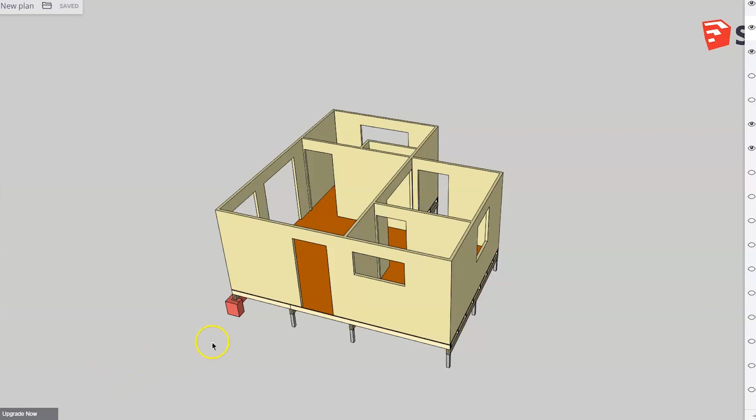Hello, today we are going to look at a brief overview of the construction of a pitched roof and ceiling frame. So here we just have a very simple small layout of a house. I've just drawn this up in a free SketchUp program. So very simple, straightforward few wall frames in there.

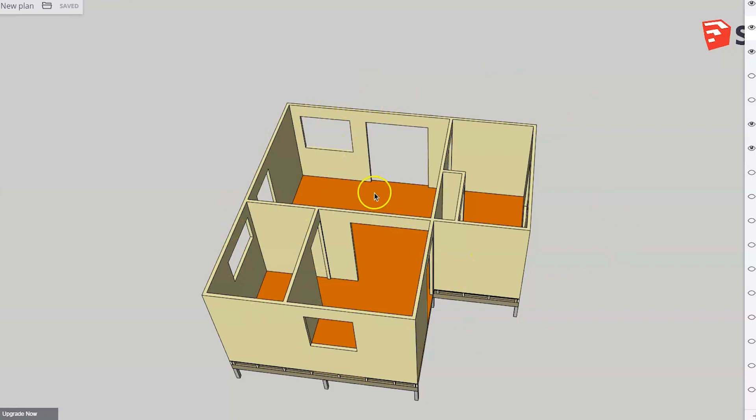Just to avoid things getting a little bit confusing when talking about the roof, I've just taken a copy of those top plates which I've placed over here, and this is what we'll be working on today. So we're not going to look at any detailed construction techniques. It's just a basic overview of the process of going through and building this roof frame.

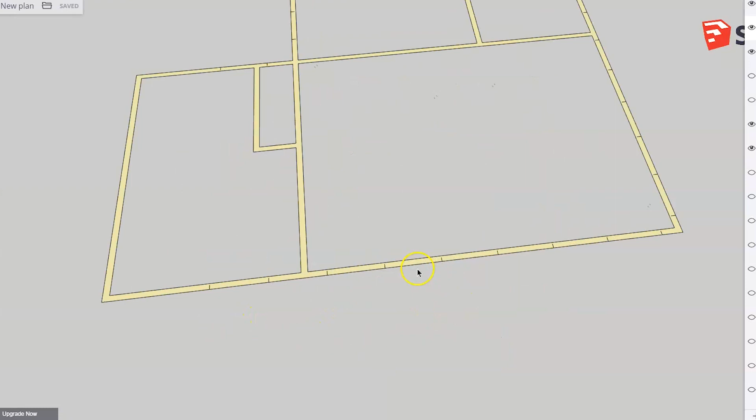So the first thing you'll notice on these top plates is I've got a few pencil lines marked across here, and they are the positions of the rafters all marked out there. I'm not going to go through how to work out those positions. I've got other videos for that.

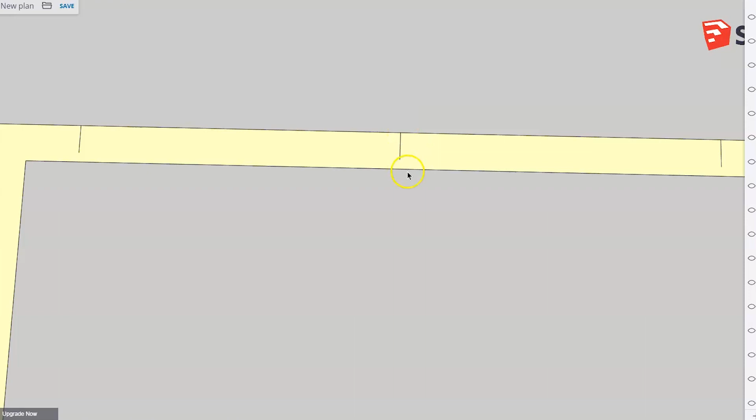But the one thing we do want to look at is that these marks are the edge of my rafters, and you'll notice if I turn the rafters on, they are on one side of the line, and my ceiling joists are on the other side of the line. And there's a very important reason for that. The first thing we need to mark out is our rafter positions. But the first pieces of timber that we're going to install is going to be our ceiling frame.

And here's the first members that I'm putting in. These are our ceiling joists. They just go from top plate to top plate. They take our ceiling sheets in from underneath. And we've got a few trimmers where the hip ends are and we can't get a ceiling joist right along the wall. We have to turn trimmers around there, lining up with those marks that we had for our rafter positions.

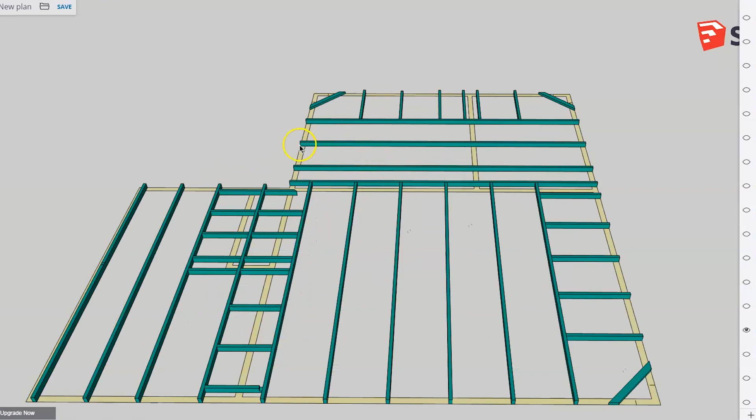So there's a reason we want to start with our ceiling joists, and one is to tie these top plates together so that the weight of our rafters doesn't push our wall frames out. The other reason is once my ceiling frame is in, I can lay some planks or maybe some plywood across them, and it gives me a relatively level platform that I can walk around on while I'm building the roof frame. Just makes it a lot easier to get those rafters up afterwards.

So let's look at these ceiling joists. Now you can see that in a normal house, these ceiling joists may need to span quite a long distance. So I've got a couple of choices. I can either use quite large pieces of timber that can go across in one hit, or I can actually save a bit of money and use smaller pieces but support them through the middle.

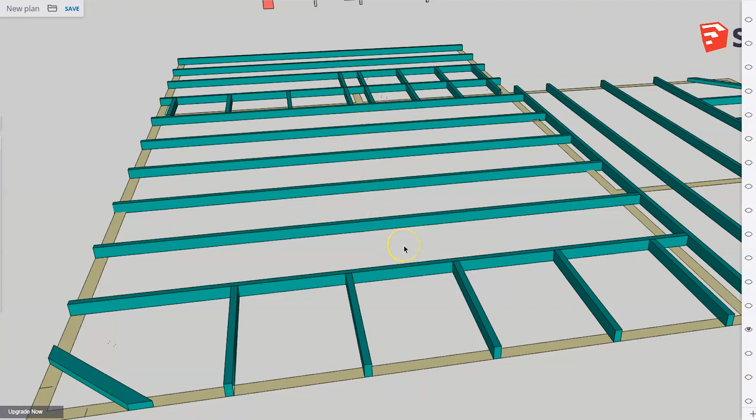At the moment these are a single span ceiling joist. If I support them through the middle, it makes them continuous span, and it also halves the effective span that they have to carry. And we do that with hanging beams. Let me just turn them on if I find them in my list. There they are. So there's some hanging beams.

So you can see over here, we've got a span there that's not very big, so that ceiling joist can span that, no worries. This span here is a little bit bigger. So I've got a hanging beam in there, obviously called that because the ceiling joists hang from them underneath. We'll nail some little cleats on there just to connect them so they can't separate.

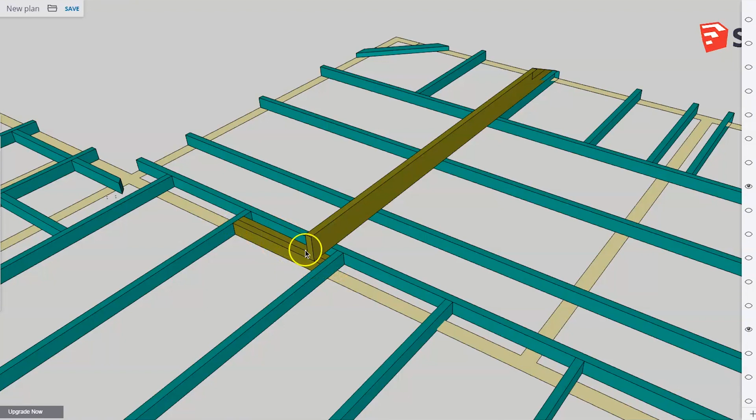And the hanging beam is blocked up on the end by some blocking, or if you can't get blocking in, you might line it right up over the top of a ceiling joist trimmer here. And of course that angle is cut off just to suit the angle of those roof rafters, which I'll deal with in a second. So those are the hanging beams.

Now this hanging beam here you can see is in the same situation as the ceiling joist. It's actually quite long, which means a huge piece of timber to span that distance. Or I can support my hanging beam halfway through the middle. And I do that with a counter beam. And that's the counter beam there. Just gives me a chance to halve the span of these hanging beams and reduce the size of the piece of timber that's got to be hauled up into the roof to do that.

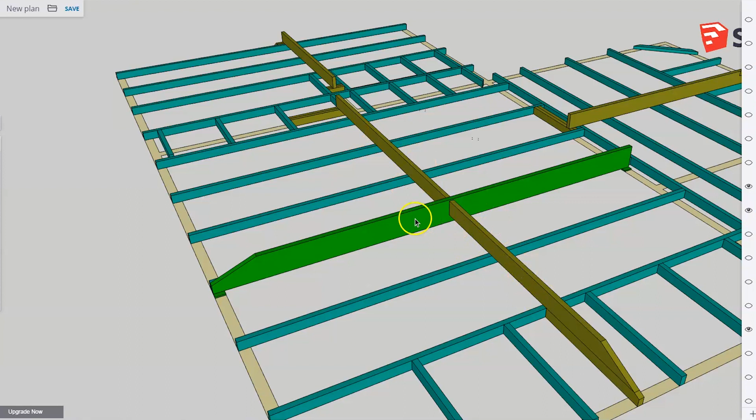So there's our basic ceiling frame. Ceiling joists, hanging beams to hold up the middle of our ceiling joists, and strutting beams to hold up the middle of our hanging beams.

You'll notice over here these hanging beams don't line up with each other, and that's okay, provided these ceiling joists are not spanning more than they're allowed to, which you determine from the span tables. They don't really have to be dead in line with each other. And you'll find this is only positioned here because there happens to be a convenient wall sitting in a spot where we can run this off.

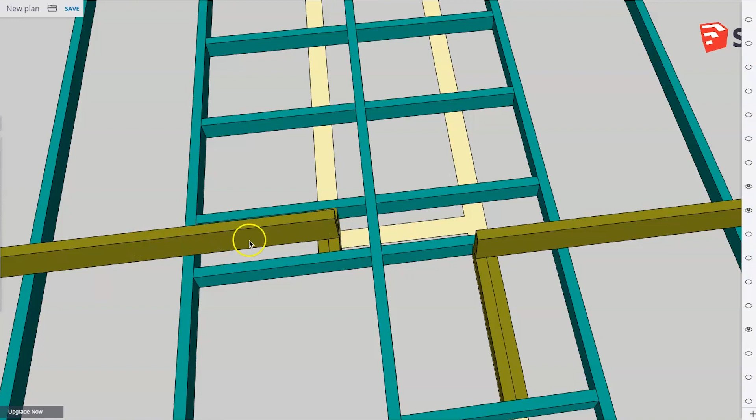And when you're dealing with a hand-pitched ceiling frame or a hand-pitched roof, that's really what it's about, finding whatever you can find to prop things off and to block things up off. Right, so that's our ceiling frame. It's all nice and firm and supported. I can get up there with a few planks or sheets of plywood and I can start installing my roof members. So the first roof members I'm going to worry about are my common rafters and my ridge boards.

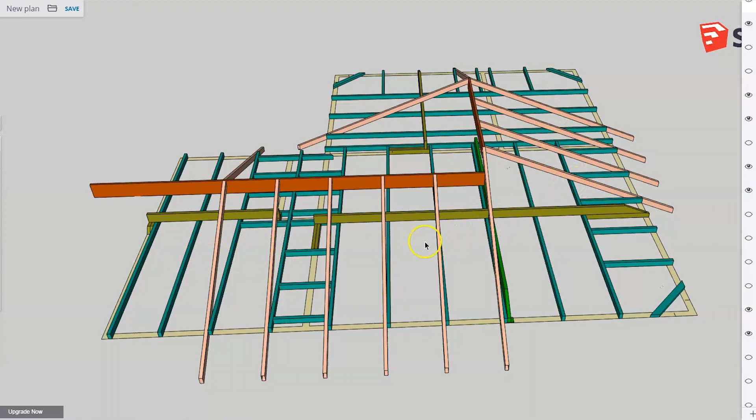So these get the basic skeleton of the roof up. These common rafters are the easiest rafters to cut up. There's usually multiple ones all cut the same through there and multiple all cut the same through there. Once we put those up, that gives us the basic kind of shape that we can fill everything else in.

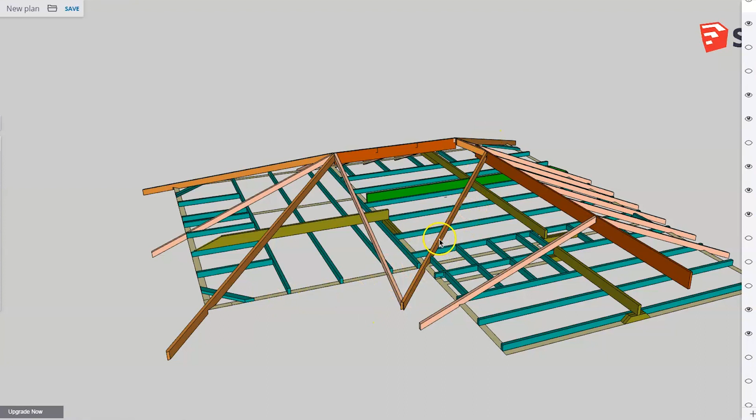So the next thing, once we've got common rafters and ridges, we can get our angled corner pieces in, which are our hips and our valleys. So there's our hip rafter on this end, on that end. Here's our hip end on that side, and there's our valley going up through there. You'll notice this end is a gable end on the roof, so there's no hip rafters on that section.

So anyway, we've got some shorter creeper rafters to put through here. And try that again without coughing.

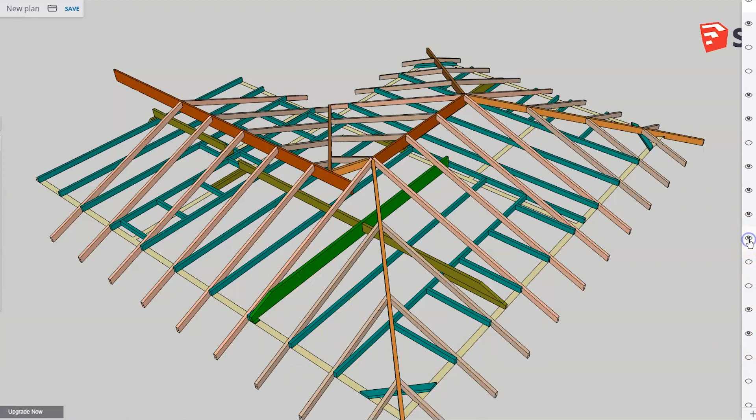So we've got some shorter creeper rafters to fill in these corner pieces. So they're the next ones to go in. And that fills in our hip ends. You'll notice all those creepers line up with our ceiling joist trimmers. And we've also got the creepers coming down into this valley rafter here. These are our valley creepers.

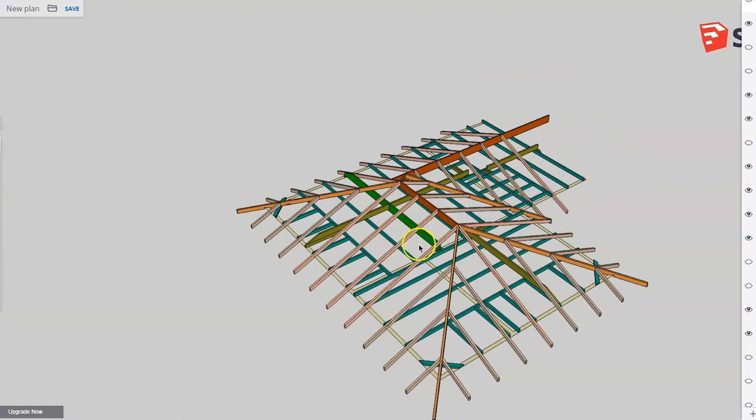And you can see that is basically the main roof done. We've got a bit of missing roof over here on that gable end. Let's have a look at that end. Now there's a reason this is not built yet. That's because these rafters right out on the end, these are our barge rafters because that's where the barge board gets nailed to. Some people will call them verge rafters, it's the same thing.

But whereas these rafters have both a ridge board and a top plate to sit on, this doesn't. There's nothing holding up this end. So we need to put in some framework to be able to hold up these barge rafters. So let's just get rid of that for a moment.

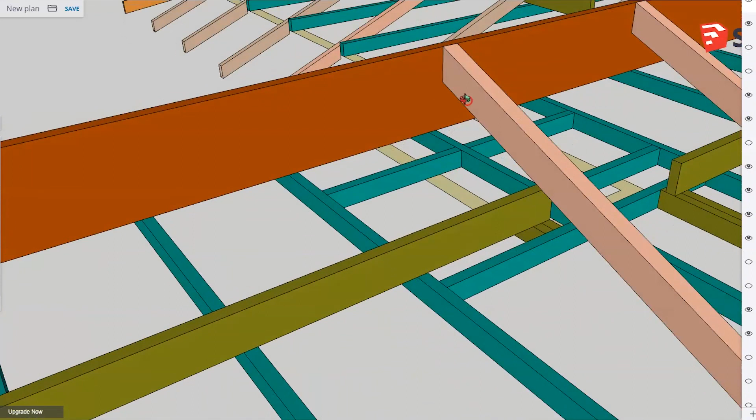The easiest way to do it, if I have a look at where this rafter hits, if I just grab the bottom corner of here and just run a line out along the ridge to give me a height, and where the rafter hits on the top plate, I can just measure that distance along there and run that line over here, and it gives me a finish point down there, and I can build a little gable wall like that.

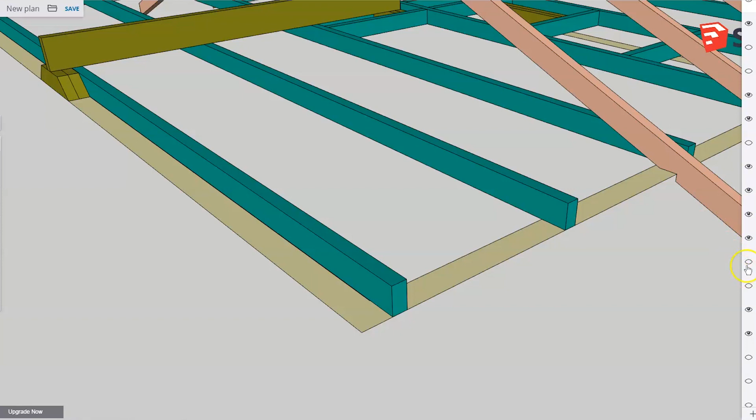So you can see the top of the wall lines up with the bottom of that previous rafter, and the top of this point lines up with the bottom of that point of that rafter. It's really just measuring how far across the top plate it hits and copying that measurement there.

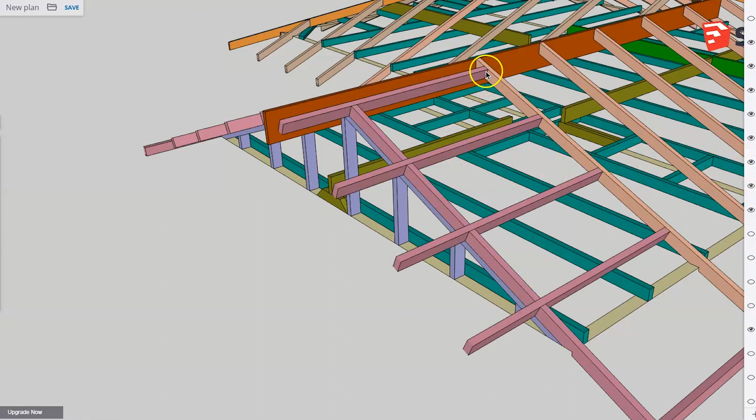So once this little end wall is in, I can run some pieces across to overhang that, and those pieces are called outriggers. So there's our outriggers going from our previous rafter, carrying over the top of that wall and coming out over the end, ready for us to nail our barge rafters to it. And that forms up that little overhang there. If I can get a view under there. So there's our overhang for our gable end built.

Now you'll notice something, and any of you who have ever built a truss roof, you'll notice something looking a little bit different here. And that is that this rafter here is quite a distance back from that wall. Now, most truss roofs that I've built, whatever that overhang is, this next truss back here is the same distance back. But on this hand-pitched roof, the first rafter back is much further.

And that's because trussed roofs are designed and engineered by the truss manufacturer. A hand-pitched roof like this is designed and engineered by the AS 1684. It comes out of an Australian standard. And the AS 1684 actually specifies that these outriggers have to comply with a certain rule, and that is that whatever the overhang is, the back span must be at least double. And that's why this rafter is so far back.

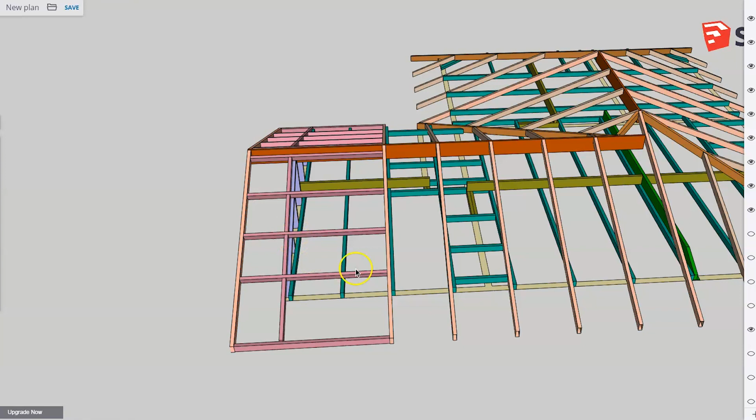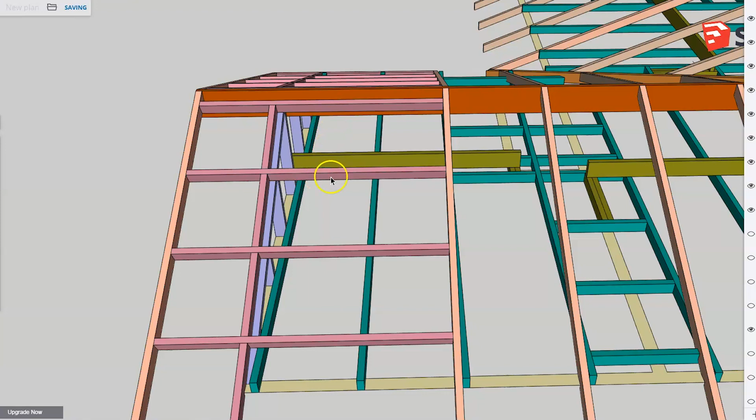Okay, so just in case you looked at that and thought, gee, that doesn't look right, it is a different looking construction than a trussed roof. And the only difference is you've just got to make sure that when you put your roof battens on, your roof battens have an allowable span, and if that span there is too great, then maybe it's either a case of moving these blocking pieces back a bit or putting a second row of blocking through. But that is the basic shape of our roof.

Alright, now we're going to have a look at these rafters. These rafters are also in the same situation that these ceiling joists were in. I can either use big size rafters to span the whole distance in one hit, or I can support them in the middle and use smaller size rafters and save a little bit of money in volume of timber. And what supports these is called an underpurlin.

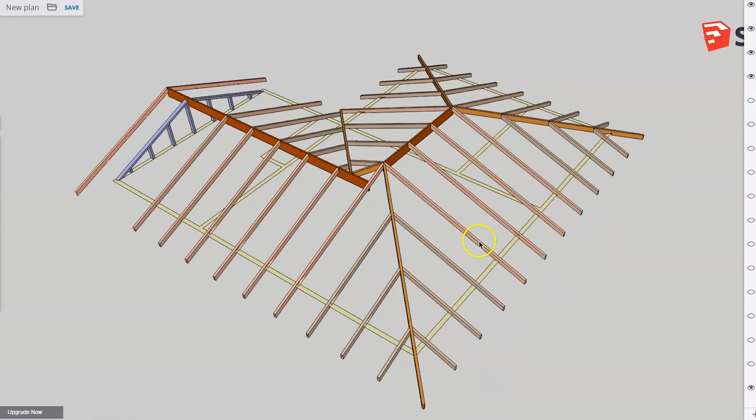So before I put that in, I'm just going to turn off the ceiling frame just so it doesn't get quite so confusing looking at all these different lines. And in fact, I might even just turn those outriggers off too, just to make it a little bit clearer. So here's a view of the top of our roof. I'm going to throw in our underpurlins as soon as I find them. There they are. So a piece of timber that just runs all the way around.

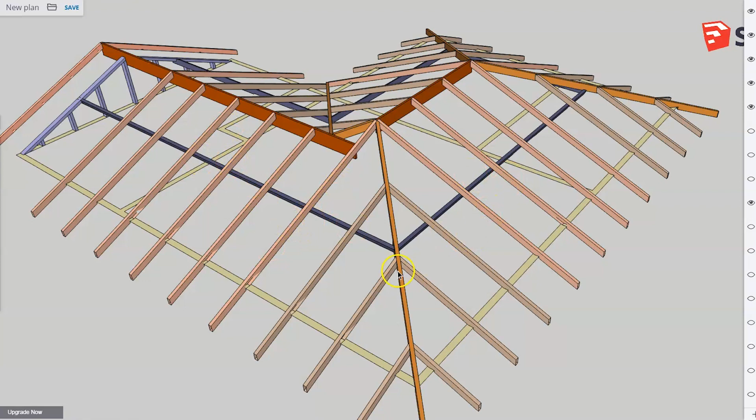You'll notice it's not exactly halfway, it's slightly above halfway there, slightly below halfway there. That's just because I've got two different size roofs. And that's okay, so long as it's in the middle third. So it's in the middle third of both roofs. And that underpurlin just sits up underneath and supports the middles of those rafters. So of course the next question is, what is holding up the underpurlins?

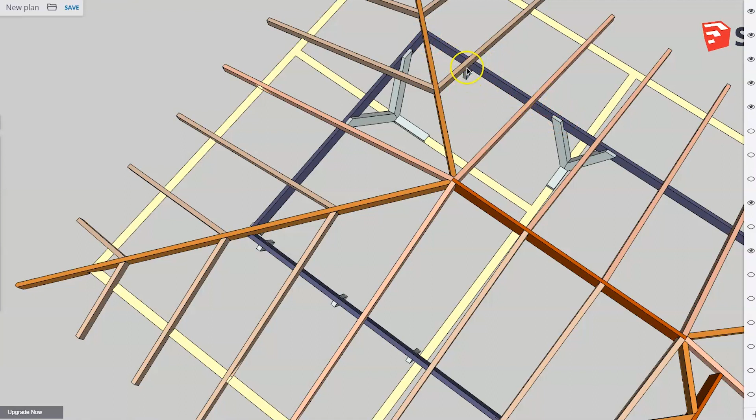Well, I'm going to have a look around from this side, and I'm going to show you the struts. So there's a couple of fan struts in here, there and there. They just basically strut off a wall and hold up the underpurlin. But you'll notice this underpurlin spans a long way from where that's supported by that strut. It's trying to cantilever a long distance, so I need to strut something up here, but there's no wall to go off. And same situation over here, I've got a wall there to strut off, but nothing through here.

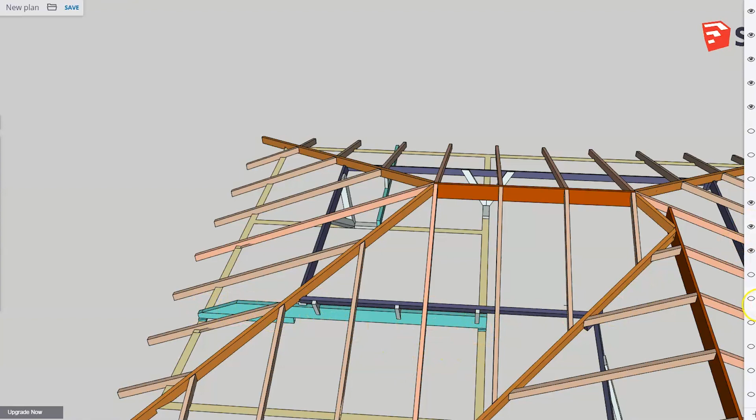So I need these struts to sit on something. And so I can use a strutting beam. And there's a strutting beam just blocked up off the top plates. Now I'm going to turn the ceiling joists back on so that I can show you something very important down here. I zoom in on that strutting beam and I just take a look under there. You'll see the strutting beam is not sitting on the ceiling joists. And that's because ceiling joists are not designed to take roof load. They're only designed to take ceiling load. So you cannot have your strutting beam sitting on top of your ceiling joists.

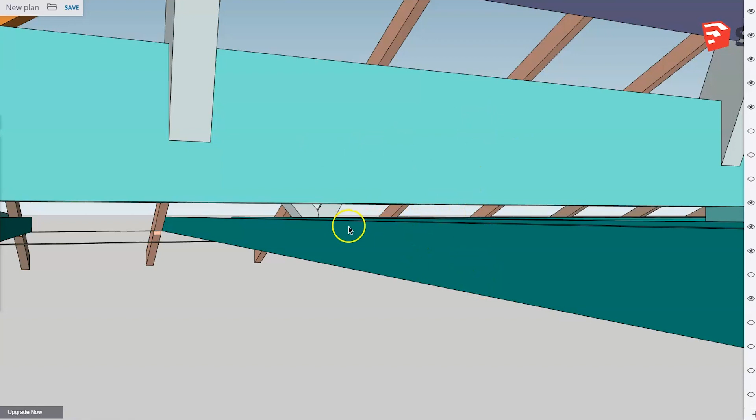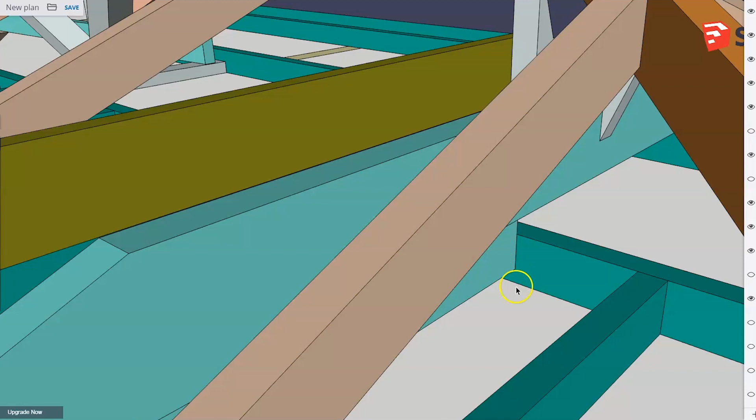Okay, and so if I turn the hanging beams back on, you can see the strutting beam. If I just get a bit of a view through there, you can see the strutting beam has been blocked up a little bit higher there. And over this end, I've just thrown in an extra trimmer, if you want to call it that, although it's sitting up above the ceiling, so it's not taking the ceiling, but it's a piece just so I can get that strutting beam attached and sitting on the wall frame.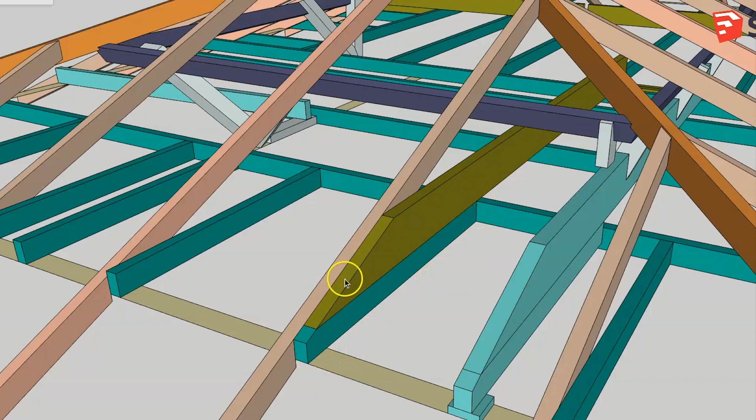So ideally, if these cuts on strutting beams or hanging beams are too shallow and your beam is not sitting directly over the top plate, you might have to put a strap or something on the back of those trimmers just to lock it together and turn that end into kind of a little engineered beam, if you want to call it that, just so that it's got decent support at the ends there and there.

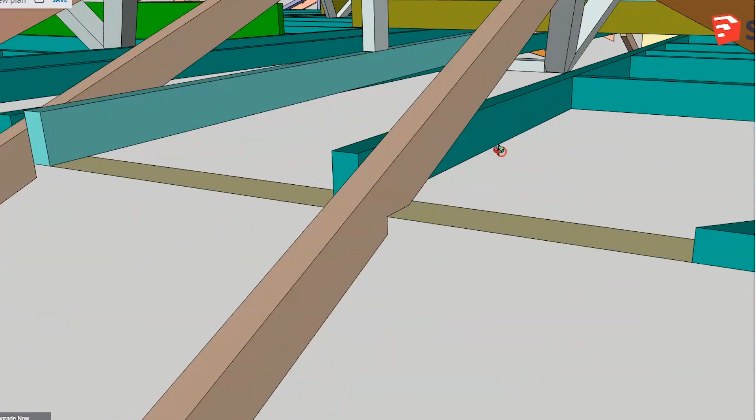So we've actually got two different types of strutting beams here. We've got one that goes across over the top of our ceiling joist. We've got one over here that is parallel and sitting in between our ceiling joists. But if I get a view through there, there is still a requirement for that to be blocked up above the ceiling lining. And all of these blocking sizes, the distance that these have to be blocked up, they all come out of the 1684. So it's very important that that document, AS 1684, becomes your best friend on the building site.

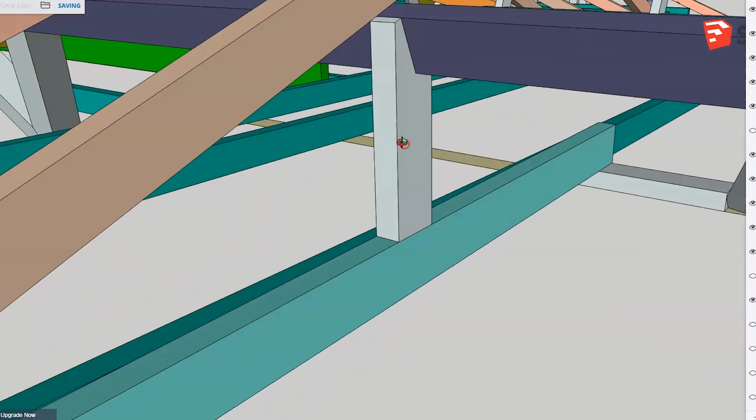So here we have an example of a vertical strut. We've got some angled cuts around the underpurlin and just a flat cut at the bottom. And we've got over this side some perpendicular struts where we've got some square checkouts around the underpurlin and our angled cuts are around our strutting beam.

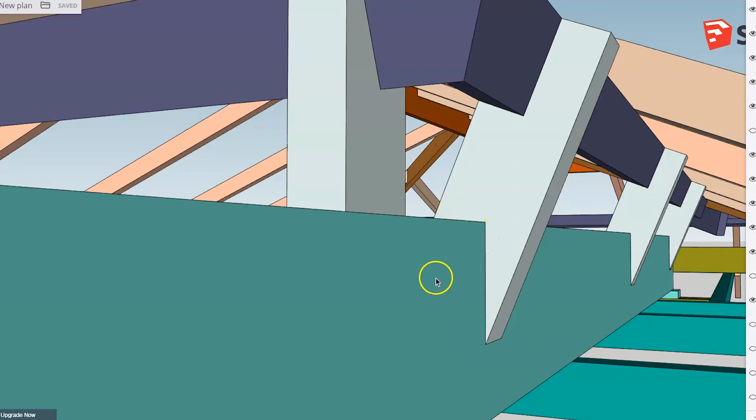Alright, while we are on the subject of holding up our underpurlins, I want to have a look at this corner over here. You can see there are absolutely no wall frames that we can strut off, and we actually can't get any strutting beams either because we've got a hanging beam in the way of anything running that way, and we've got a counter beam in the way of anything running that way. So we've got a couple of options. One thing we could do is put a strut from the underpurlin down to the counter beam, but doing that comes at a price.

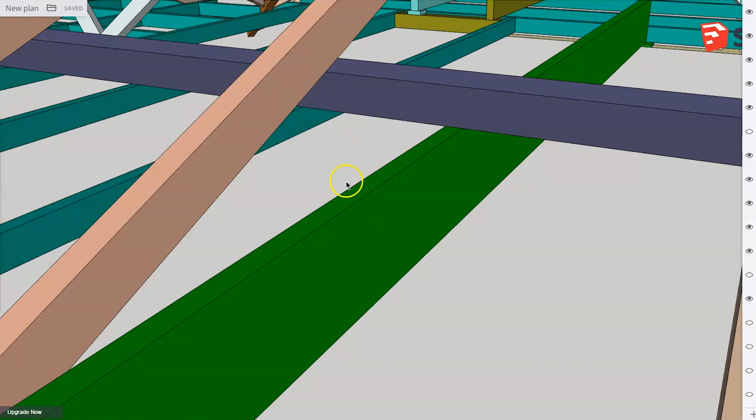Right now, this beam is a counter beam only, designed to take ceiling loads only. If we strut off it, it becomes a combined counter strutting beam, which means we have to use a different span table to size it. It has to get a little bit bigger so that it can take both roof and ceiling load. And it's very important to understand that if you size a piece of timber and you install it, you know what you have sized it as.

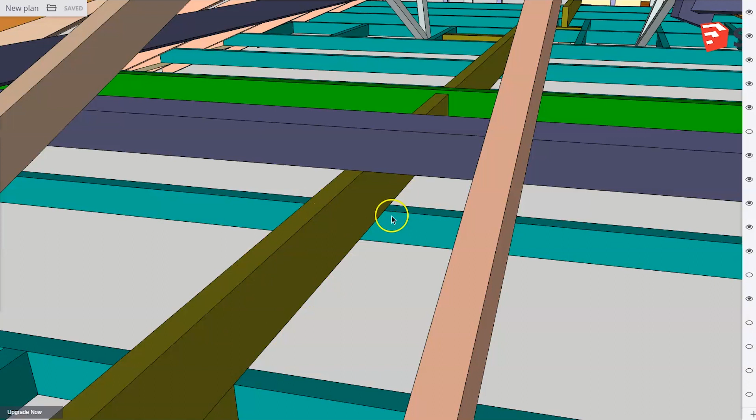And the same thing we can do around this way. We could run a strut down to that hanging beam and turn this into a combined hanging strutting beam. If we were to do that, this hanging beam would be a combined strutting beam, and you would find that it would be a little bit bigger than this one, because this one is only taking ceiling load. But for today, I've decided I'm not going to turn those into combined strutting beams. I'm going to use a different method to hold up this underpurlin.

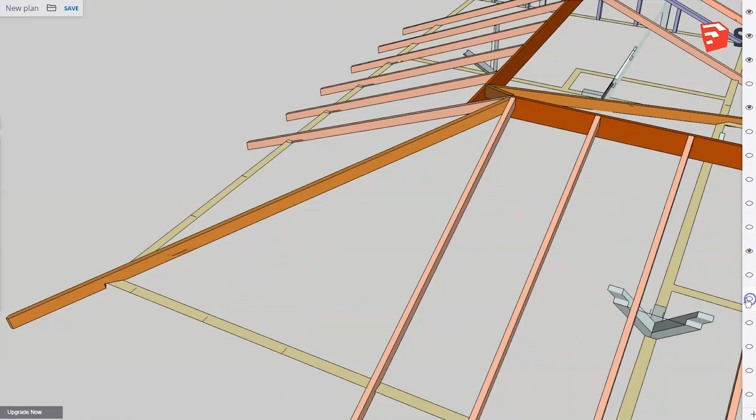And before I show you what it is, I'm just going to turn off some rafters so it's easier to see what I'm talking about. So I'll get rid of them. I better turn that underpurlin back on. So there's my underpurlin. You'll notice the connection here is a little bit different. Over this side, the underpurlin has been cut around and underneath, and the underpurlin is holding up the middle of that hip rafter.

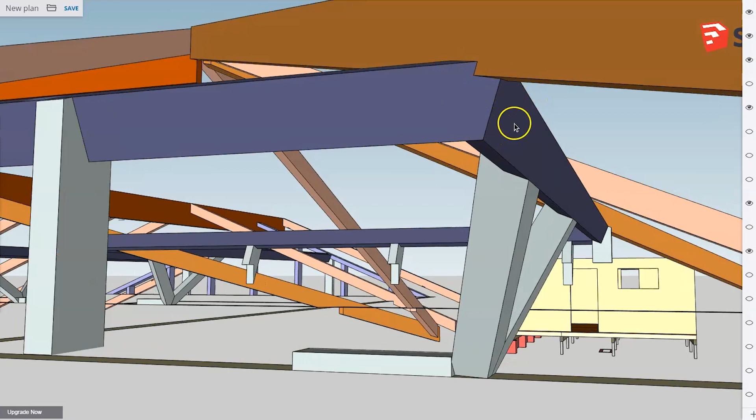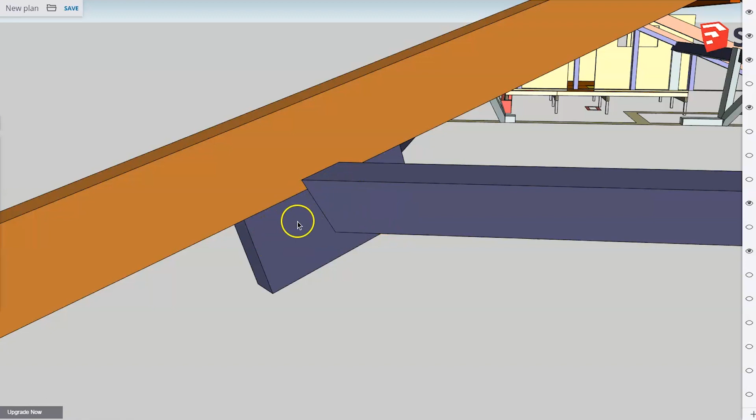But over here, I've attached a block to the underside of the hip rafter so that I can just have a straight cut, and I might have a piece of metal strapping or something connecting that block on nice and securely, maybe some framing anchors holding the underpurlin on. Instead of using the underpurlin to hold up the hip rafter, I'm going to do the opposite and use the hip rafter to hold up the underpurlin, and I do that with a tie bolt. And there's a tie bolt. It's just a big metal rod which bolts at either end in a position that doesn't get in the way of the rafters.

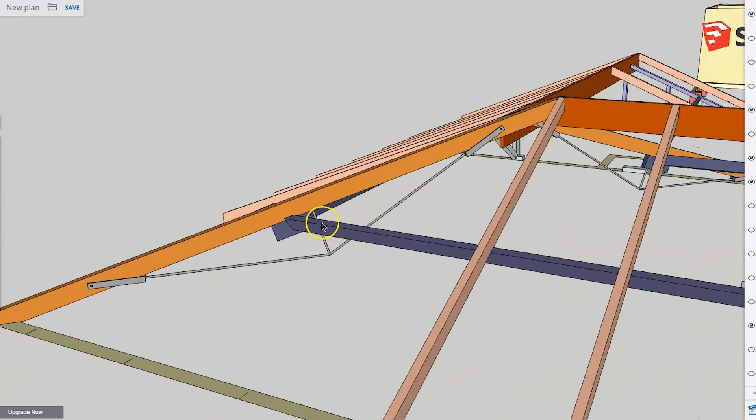It's got a little support, and if you'll notice, it kind of looks a little bit like an upside down truss, and it works in kind of the same way, using that triangular shape to support the middle of that hip rafter. That hip rafter has now been strengthened, and it can carry the weight of the end of that underpurlin, which now goes across here. The underpurlin is now supported at both ends and is supporting our rafters.

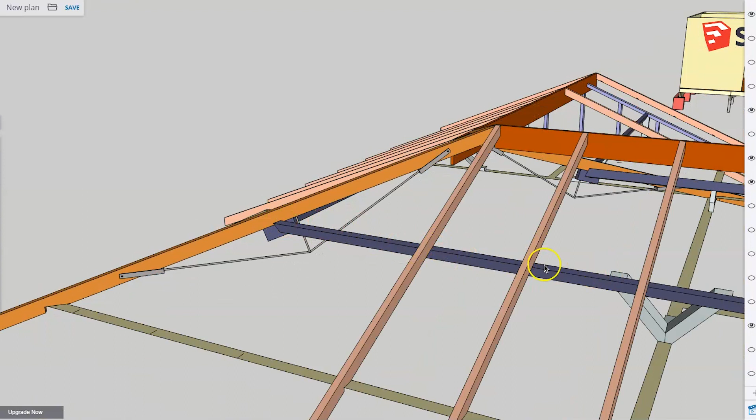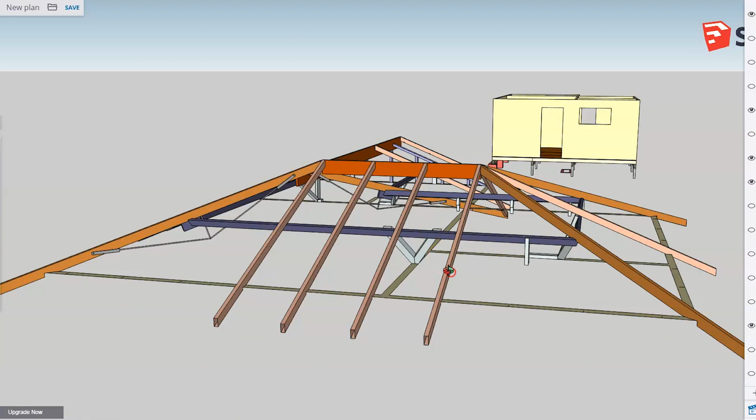So that's our options. We can use a tie bolt to hold up the hip rafter, and the hip rafter holds up the underpurlin, or we can use a strut to hold up the underpurlin, and the underpurlin holds up the hip rafter. So those are our options, and of course this end would probably be our preferred option, but if we can't get any strutting beams through or any wall frames in the right spot, we have to go to our tie bolt.

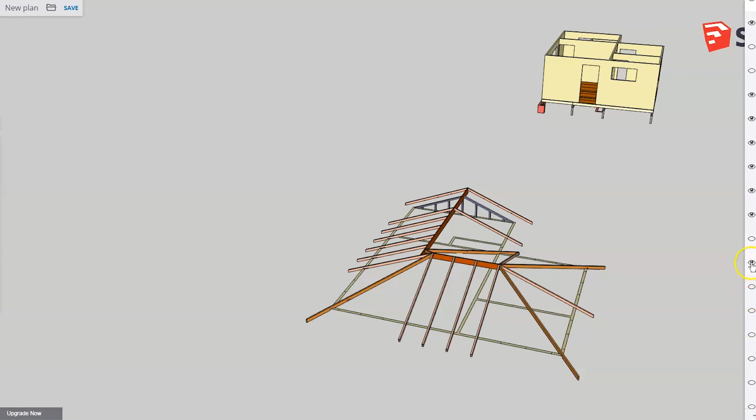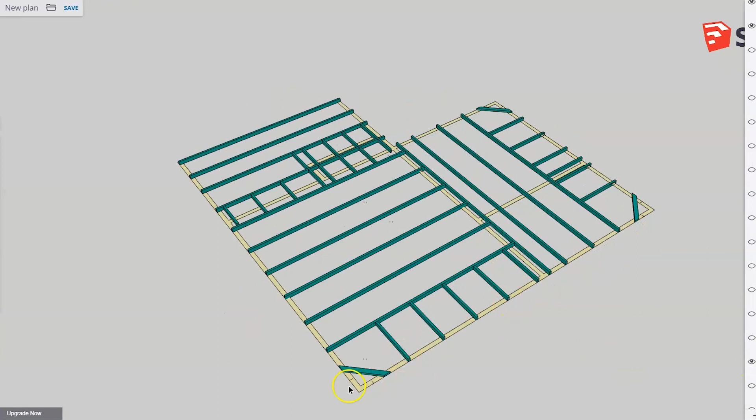Alright, so let's get rid of all of those and we'll do a very quick recap over what we have just covered. We start off with our wall frame, our rafter locations marked. We mark out our roof frame first, but we install our ceiling frame first. So there's our ceiling joists, our trimmers in there. We use hanging beams to hold up the middle of our long ceiling joists, and we use a counter beam to hold up our long hanging beams.

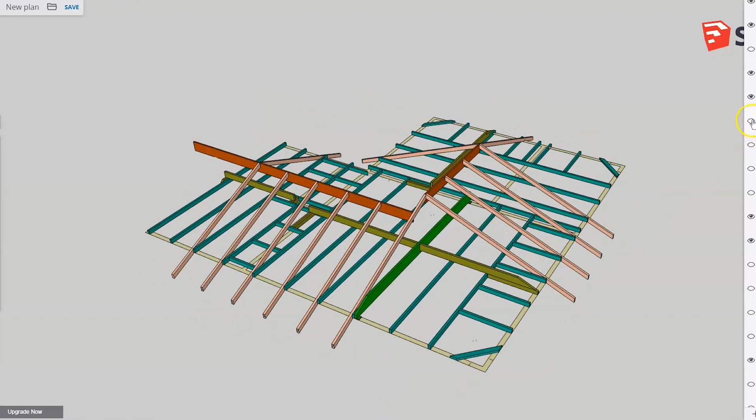Once the ceiling frame is in, we can install our ridges and our common rafters to get our basic skeleton up. We then fill in our hip rafters to get the main shape, fill in our creeper rafters to finish off all the hips and valleys, throw in some kind of a support like a little gable end wall there so they can run our outriggers over, and put our barge rafters right on the end.

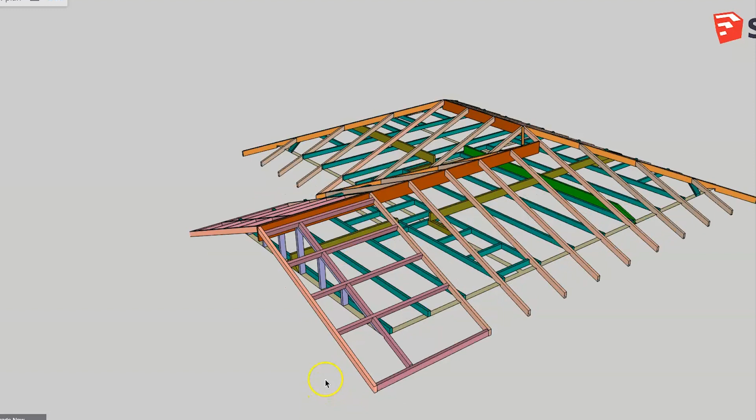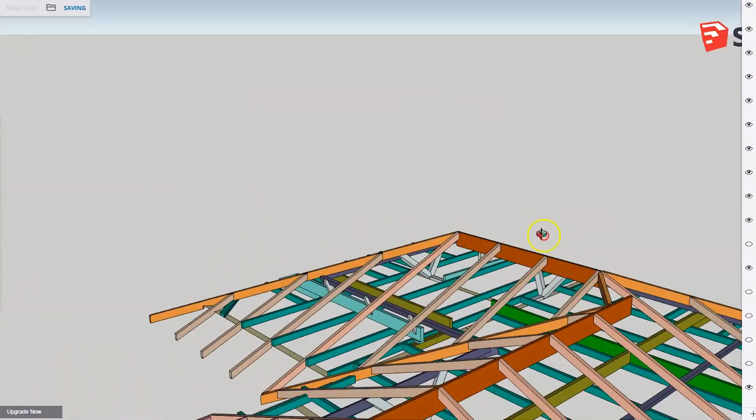Our rafters are held up by underpurlins. Our underpurlins hold up the middle of our rafters. Then we'll put some strutting beams on and some struts, and we'll strut off those beams and we'll strut off our walls to help hold them up. And any position where we can't get these struts up under our underpurlins, we can install tie bolts on our unsupported hips.

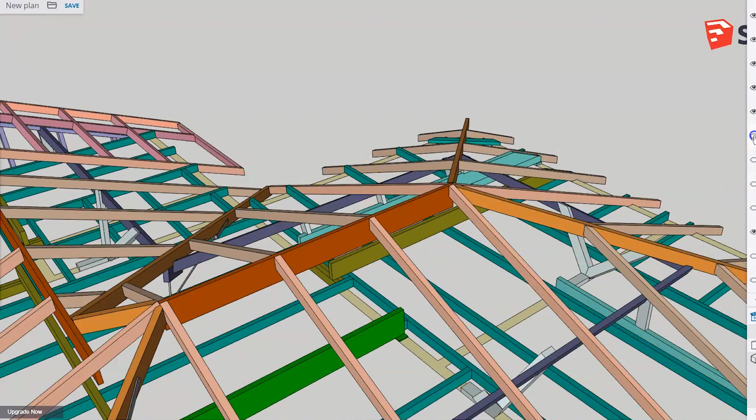And there's only one thing left to do. One more piece of timber to go in, and that is these ones that go across from rafter to rafter right on top of our underpurlins, and this is a collar tie. There are rules in the 1684 about how many collar ties you have to put in, and how they are connected to the rafters.

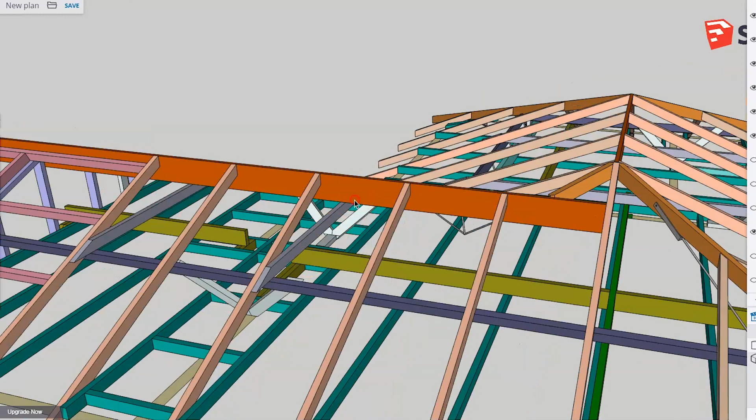And the reason I make a point of mentioning these collar ties is because there is a definition in the 1684 regarding hand-pitched roofs. They are either coupled or uncoupled. This one here is a coupled roof. Part of the definition of a coupled roof includes collar ties. If it doesn't have a collar tie, then it doesn't comply with that definition.

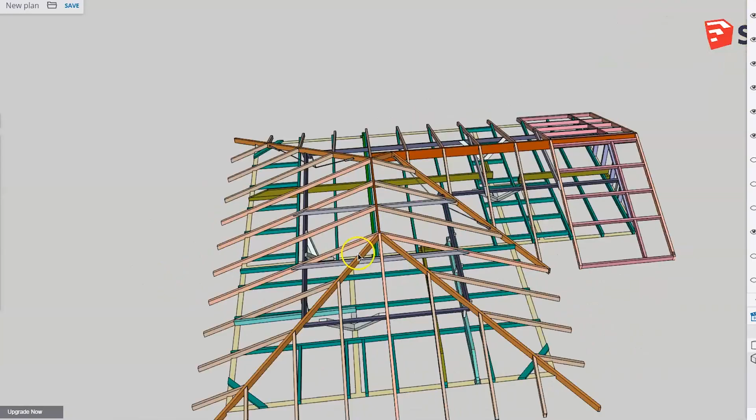So I encourage you to look in the 1684 and look at that clause that covers what a coupled roof and what an uncoupled roof means. But this one is a coupled roof, and I will leave you to your own research to have a look at the differences between those definitions. So we have now constructed, in theory at least, a hand-pitched roof and ceiling frame.

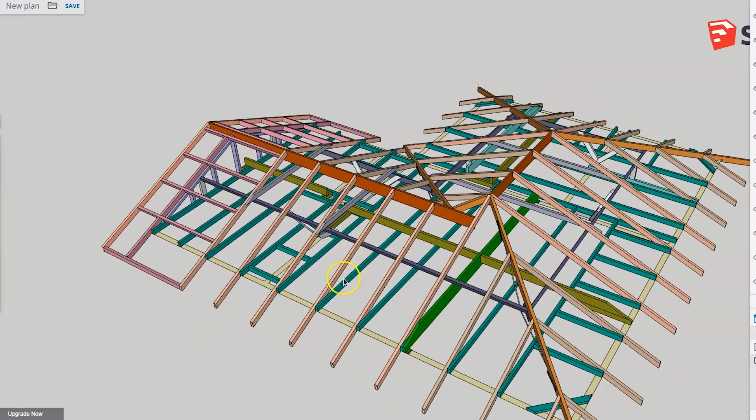Now you might be thinking the same thing that I thought when I finished drawing this. Wow, what a lot of timber that goes into a roof. And that is exactly why people invented trusses. Trusses go in like a big box of Legos almost. They simplify the whole process a lot, but I do have to admit I really enjoy building these roofs. I've worked on a couple during my building career. I've built quite a few during my teaching career, and I really do enjoy working with these angles and figuring out the lengths and building something that looks really nice.

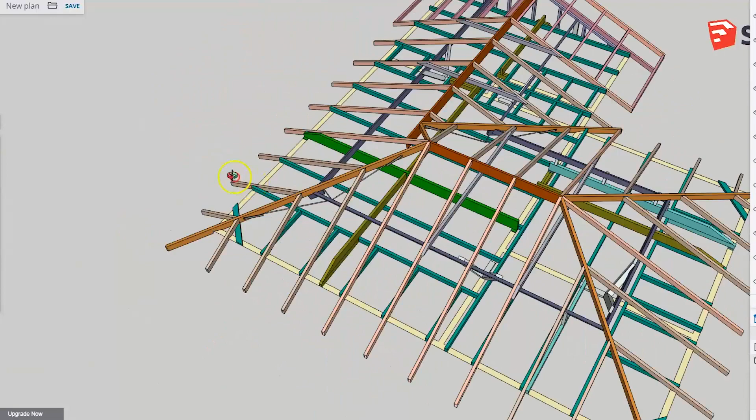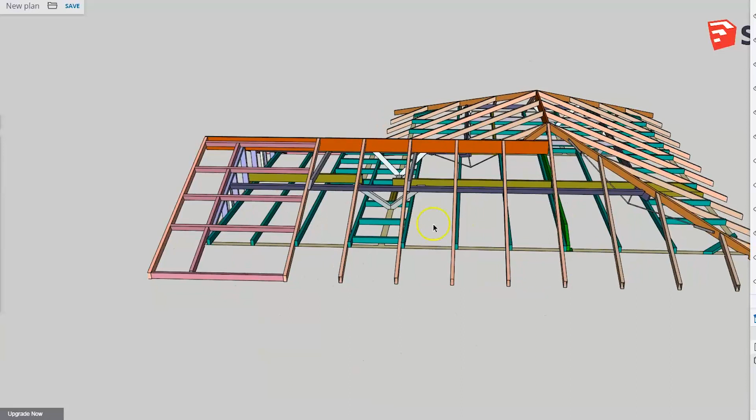And it's probably just me. I like the work that gives me a bit of a challenge. The stuff that not everybody can do, and I'll tell you right now, not every carpenter in the world could build a roof like this. In fact, probably not many of them could. So this is the kind of work I really enjoy. Unfortunately, it's not quite so common nowadays.